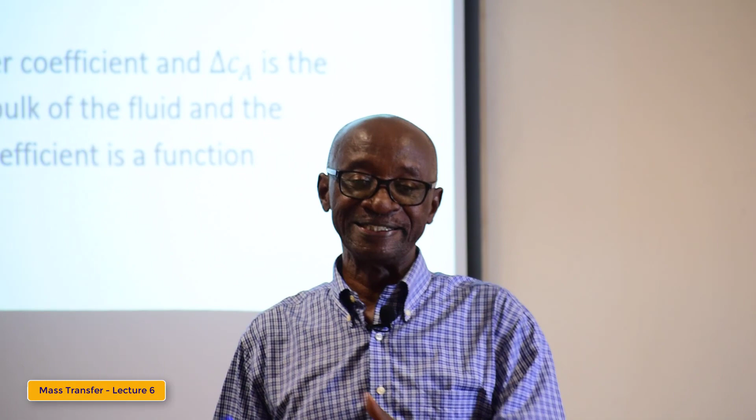In engineering, we start from the simple, and then we complicate it, as it were, to meet with reality. Sometimes the simple form that we start with might not even be realistic, but it teaches us something. Like in thermodynamics, when you want to represent the behavior of a gas, you start from the ideal gas. Then, as you develop along the virial equation and equations of state, it becomes complicated. You end up with something that represents reality.

In mass transfer, the same principle is applied. When we started out, we were looking at molecular diffusion. So I told you that you can imagine we are in a room where all the doors and windows are closed, fans are shut off, and then you release some gas in one corner. Then it finds its way into all corners of the room, just by molecular diffusion. In that kind of situation, there's no bulk movement of the gas because the windows are closed and everything.

In industry, you can't always do that. Even at home, you don't do that. When you prepare your tea or coffee, you put sugar in there. You don't sit down and let the sugar dissolve to all corners before you drink it. You don't have time for that. No more do they have time to wait in industry. So you move things around, you pump things around, you use compressors, you use blowers, and all of those kinds of things in order to hasten the process.

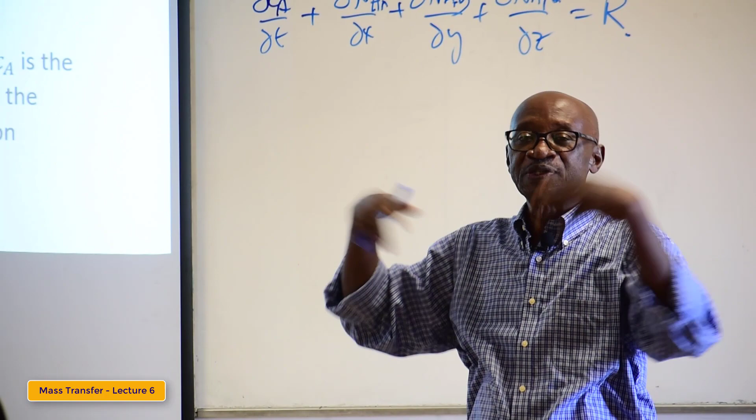And what we do is we define - that's where the concept of mass transfer coefficient, heat transfer coefficient, comes in. You define an equation, Na equals Kc delta C. So the flux is equal to the driving force, which is the delta C, and as I said, 1 over Kc is the resistance, and that is it. All you want to do then is find Kc. If you can get Kc, then the problem is done, because normally the delta Ca can be obtained from the description of the problem.

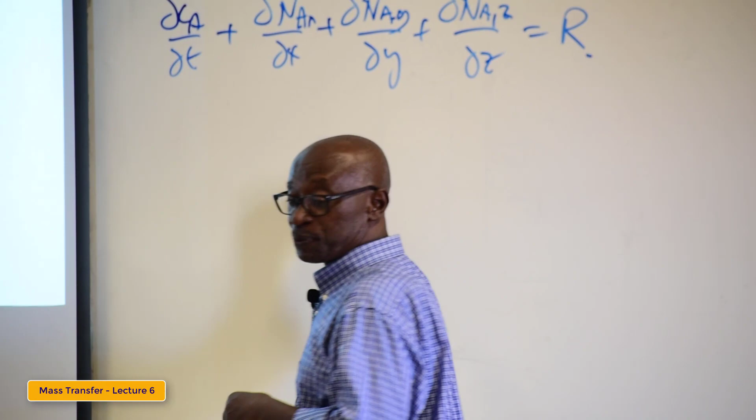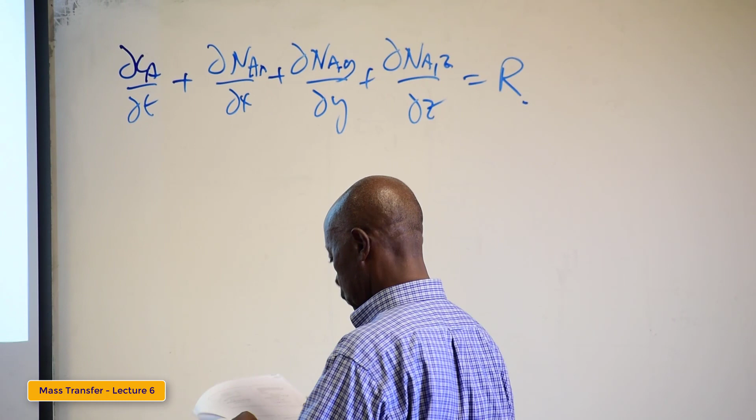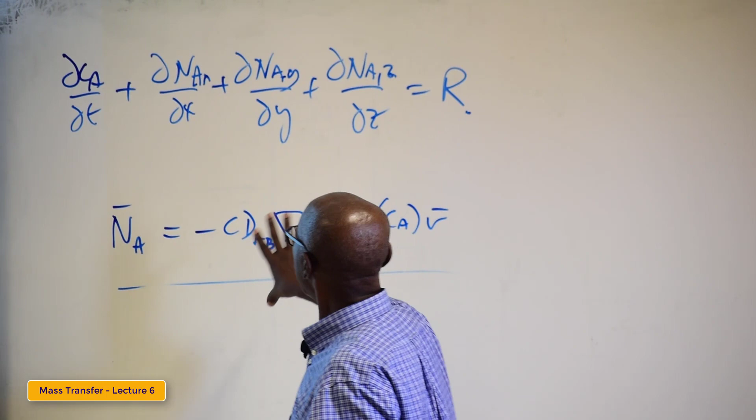So in convective mass transfer, when you express this equation... if we replace, let's say Na... Na bar equals minus C D AB grad X bar A plus CA. So if you write Na as such, then in vectorial form, Na is a vector that consists of Nax, Nay, Naz. So using the vectorial form, del CA over del T plus del dot Na bar is equal to RA.

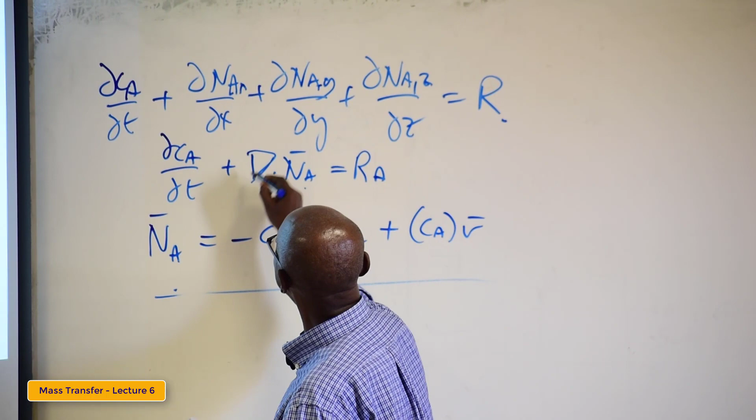So if you plug this in, then you are going to have a very complicated looking equation: del CA del T minus... C D AB grad x bar A, plus grad dot... CA is equal to RA.

Now, this equation looks easier, more easy to grasp. But this is the same equation as this, except that we have replaced the Na's with this expression - we substituted for Na. In fact, this equation probably should have come here, because when you expand this, this is what you get. You expand this, this is what you get, and then we have substituted for the Na, which is this, and then you get this.

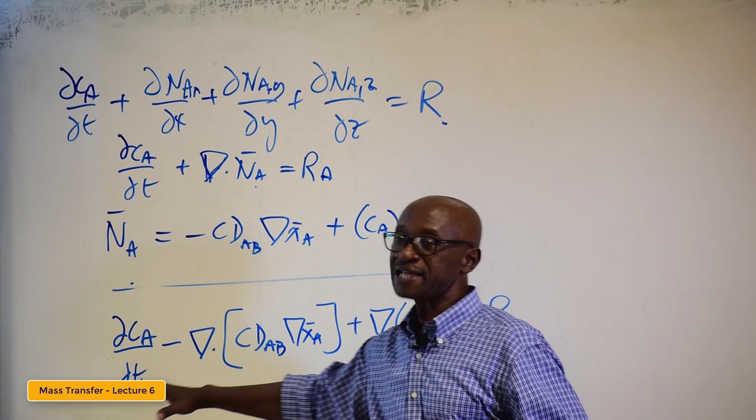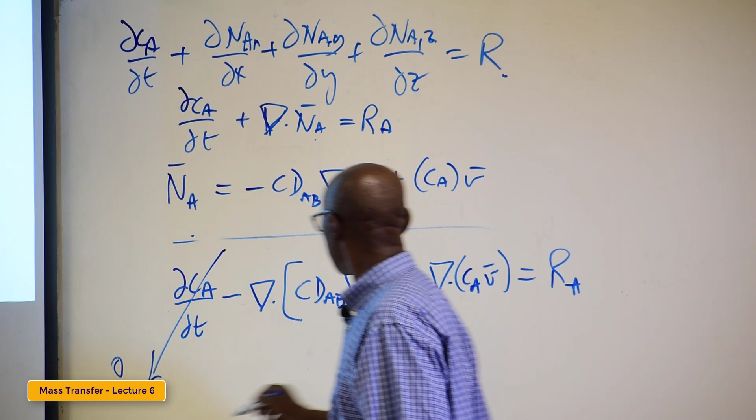If you recall, in lecture 2 we derived this equation, and then we set up all kinds of conditions to simplify it. For instance, we said suppose C is constant, or suppose the density is constant - it's the same thing. And suppose the diffusivity is constant - it means all of this gets pulled out. So if your situation is steady state, once again this term goes, and suppose the concentration or density is constant, and you have C D AB all coming out, then you have this thing, XA, plus you have this. If you go back, you find that we expanded it, applying the fact that composition is constant or density is constant. If you expand it, it's like the differentiation of two terms - you hold one, you bring the other, and so on. So if you do that, one of the terms will drop out, and you are left with this: CA, it will be V dot grad CA.

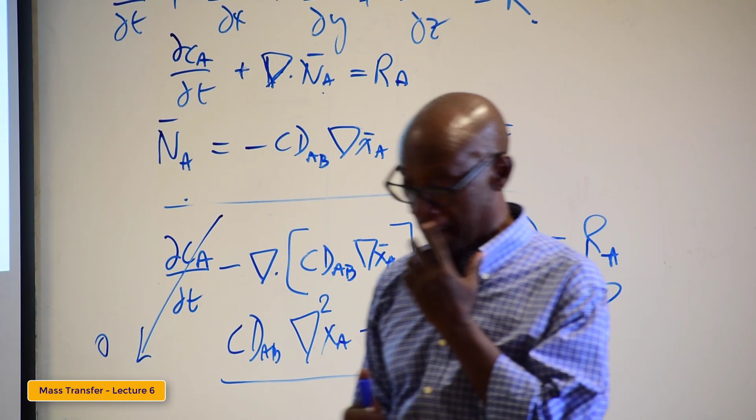If the reaction is constant, this term also drops out, and then you are left with this. But to get here, we've had to make all kinds of adjustments before we get here. So it is never possible to solve this equation with all the necessary terms and conditions. So to simplify that kind of situation, we define the equation for mass transfer coefficient, and we go about trying to find what Kc is.

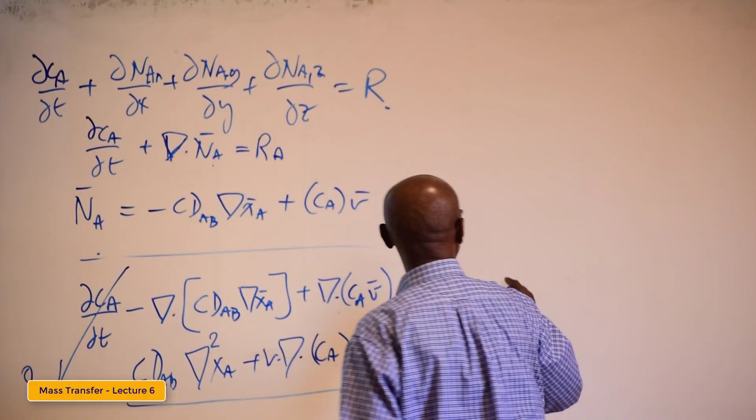What is this mass transfer coefficient for the phase that we are dealing with? Mind you, in convective transfer, you have a surface, and then you have, let's say, gas. So material is going from here to this phase, and you are trying to find the rate of, or the flux for the material going from, let's say A, into this, and so on.

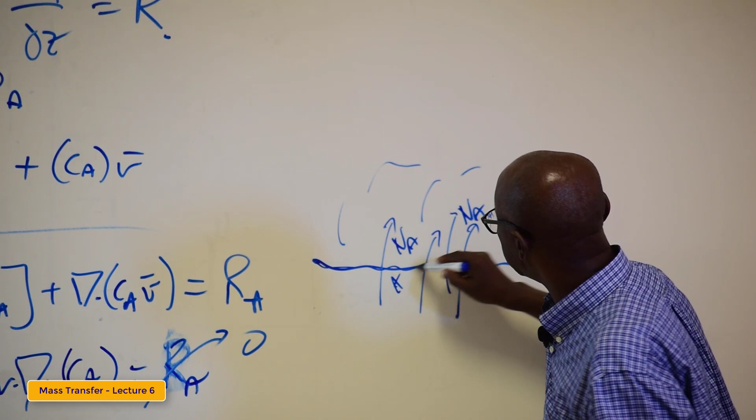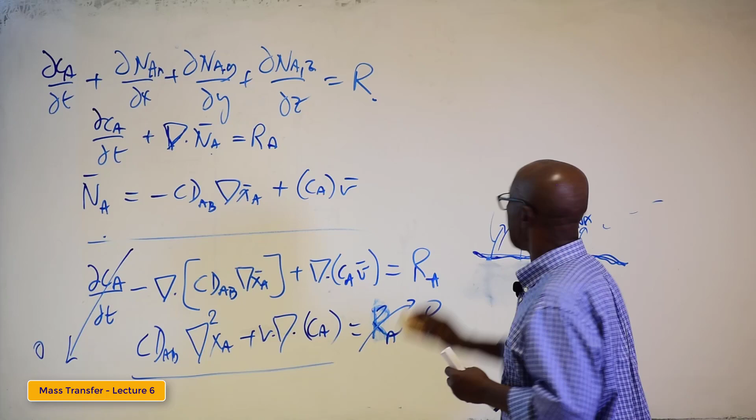You do it by determining the mass transfer at the surface. If you determine the mass transfer at the surface, then you have an expression for Na, out of which you can extract your mass transfer coefficient, Kc. If you have a way of determining the mass transfer going from the surface into the bulk, then you get an expression, and you compare that expression to the defining equation for mass transfer.

It will allow you to extract the mass transfer coefficient Kc. You understand? So we have made this definition for mass transfer coefficient Kc, and we want to find what Kc is. If by some means you get another expression for Na, then because that expression will involve delta Ca, you can get your Kc out.

Now, the Kc is a function of, it's a complicated kind of solution. It's a function of the properties of the fluid. Example, its density, its viscosity, its concentration. All those play a role in determining the mass transfer coefficient. It's also a function of the dynamic characteristics of the flowing fluid. How fast is it flowing? The velocity at which it's flowing, is the flow laminar, is the flow turbulent, and so on. So they are all part of it.

And also the geometry of the specific system of interest. Is it flow in tubes? Is it flow over a flat plate? Is it flow over a bundle of tubes or pipes or whatever? Particularly for heat transfer, that can be very important. So by listing all this, there are various methods of determining the mass transfer coefficient.

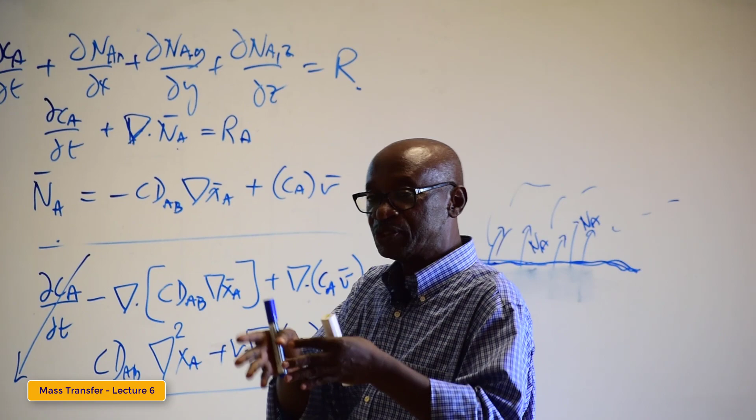When you have a complicated functional dependency like this, one of the methods you use is dimensional analysis. I don't know if you did dimensional analysis in fluid flow, fluid mechanics. That's where everybody does it, because once you do it there, you can use it in mass transfer, you can use it in heat transfer. So you don't do it at this point. When you were doing momentum transfer, fluid flow, you should have done dimensional analysis. That's fine.

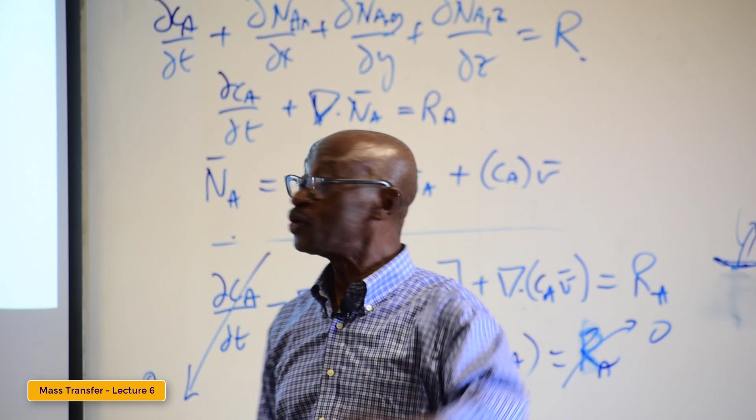But at this point, I'm just assuming that you know how to do that, you know dimensional analysis. Maybe in future, along the line, if you need to know it and you didn't do it, you have to go back and study it. Now, so that's one method of determining the Kc. You write Kc as a function of a whole bunch of properties, then you group them up, and when you do that, you also need experiments in the way it's done. You do that theoretical analysis, but you also use the experimental data to complement your analysis.

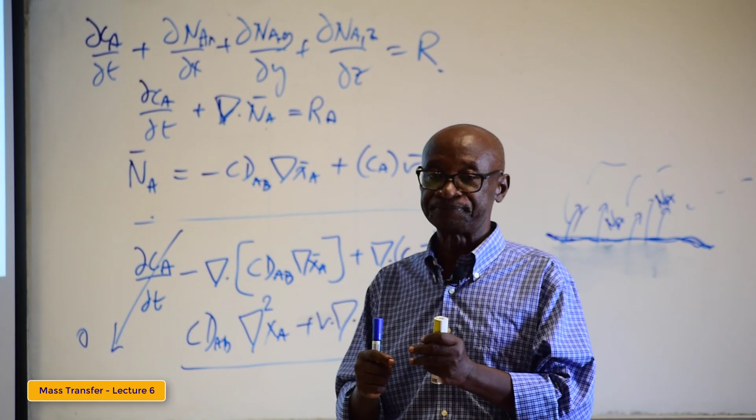So apart from dimensional analysis, you can do exact boundary layer analysis. Now, what does exact boundary layer analysis mean? It means that you have to solve the equations, depending on which ones you can get a solution to. You have to solve it so that you use it to define a flux equation, or use it to get an expression for flux, and then you go back to the defining equation and extract your heat transfer coefficient.

The thing about heat transfer and mass transfer coefficient is that once you get the mass transfer coefficient, or once you have a correlation for the mass transfer coefficient, if you want to know your flux, all you have to do is use that equation. That's it. Or use whatever correlation you're given to get the heat or mass transfer coefficient, and then use the defining equation, and then you've got your flux.

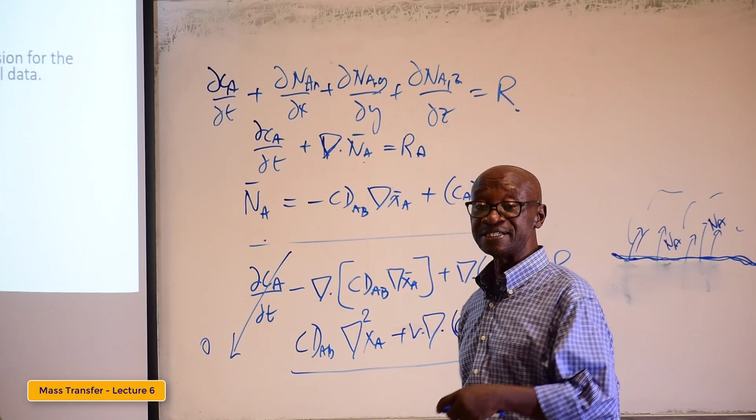So the method that we use is exact boundary layer analysis. We'll see about that, and then you can also use approximate boundary layer analysis. Approximate means that you have skipped solving these equations in their complete analytical form. Another method that's also used is the analogy between momentum, heat, and mass transfer. We'll see about that maybe next week.

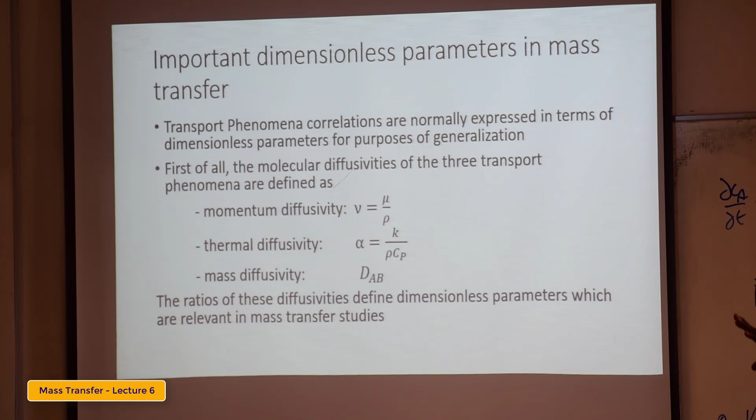So dimensional analysis, we'll leave out exact boundary layer analysis for now. But before we do that, in any of these methods, whether dimensional analysis, exact boundary, or approximate, you express mass transfer correlations, mass transfer coefficient correlations, as well as heat transfer coefficient correlations, and all kinds of correlations in momentum transfer, in terms of dimensionless parameters. So transport phenomena correlations are normally expressed in terms of dimensionless parameters for purposes of generalization. Once you do that, you don't need any specific units, because the parameters are dimensionless. Because they are dimensionless, I can use any units for them.

So first of all, the molecular diffusivities of the three transport phenomena are defined as such. This defines the momentum diffusivity, nu, or kinematic viscosity. Mu over rho is the dynamic viscosity, so nu is the kinematic viscosity. And then you define thermal diffusivity alpha, which involves the thermal conductivity, the density, and the heat capacity. They all have the same units — these three diffusivities — mass diffusivity is meters squared per second, centimeters squared per second, and so on and so forth.

Now, the ratios of these diffusivities define dimensionless parameters which are relevant in mass transfer studies. Because they all have the same units, if you divide one by the other, you end up with a dimensionless number. So we define the Schmidt number as the momentum diffusivity, nu, over the mass diffusivity, dAB. Remember that nu is equal to mu over rho. So this gives you what you call the Schmidt number.

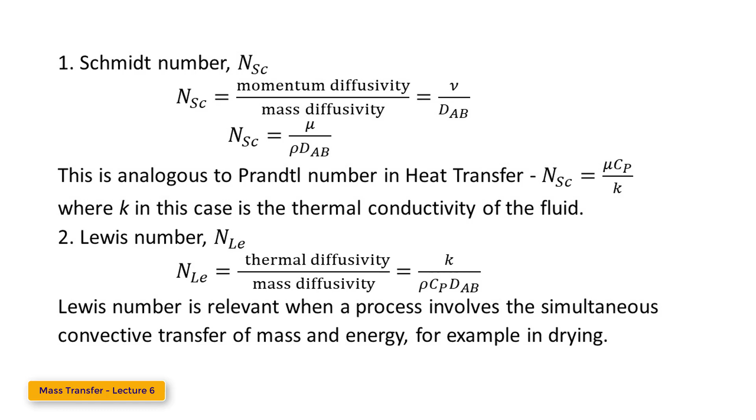And then we also define the Lewis number. The Lewis number is the ratio of thermal diffusivity over mass diffusivity. The Lewis number is relevant when the process involves the simultaneous convective transfer of mass and energy, for example in drying. It's not only drying — humidification, drying, crystallization, all those processes involve simultaneous transfer of heat and mass.

And then there's the Sherwood number. The Sherwood number is the convective mass transfer coefficient over the molecular mass diffusivity, defined as Kc times L over dAB. And the heat transfer analog of the Sherwood number is the Nusselt number, defined similarly, where H is the heat transfer coefficient and K is the thermal conductivity.

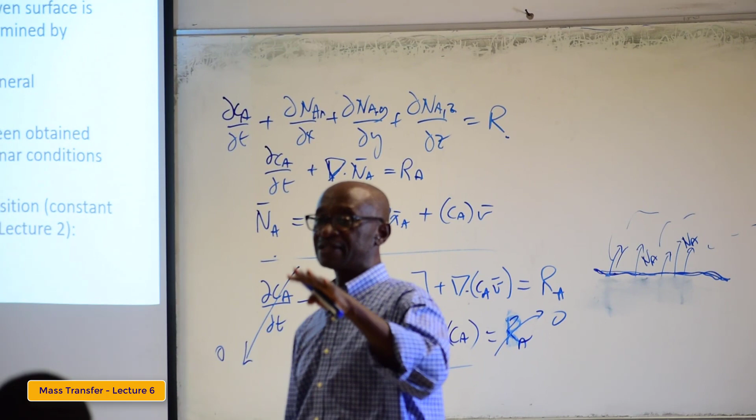These dimensionless groups are used in dimensional analysis. So now we have three situations that we look at: exact boundary layer analysis, approximate boundary layer analysis, and then — but not today, next time — we will look at the analogies between momentum, heat, and mass transfer. Then we'll do interfacial mass transfer. That'll be next time, and then we'll finish.

So if the concentration profile for a given flow, for a fluid flowing over a given surface, is known, then the mass transfer coefficient can be determined by applying the defining equation. I told you the defining equation: Na, for instance, is equal to Kc times delta C, and the concentration profile is where the concentration occurs. So we have Na equals Kc delta C. Delta C is nothing but the concentration profile.

The profile can, in theory, be obtained by solving the general differential mass balance equation. Now, an analytical solution of these equations has, however, been obtained for only the simplest of cases, namely flow under laminar conditions, not turbulent conditions, over a flat plate, not a tube. The steady state, not unsteady state. So all of those things.

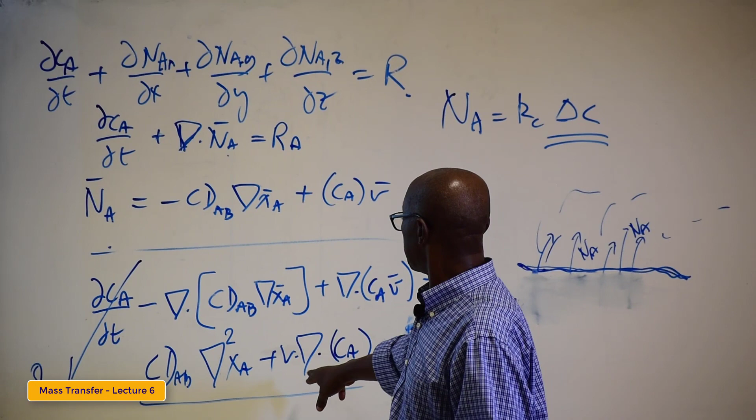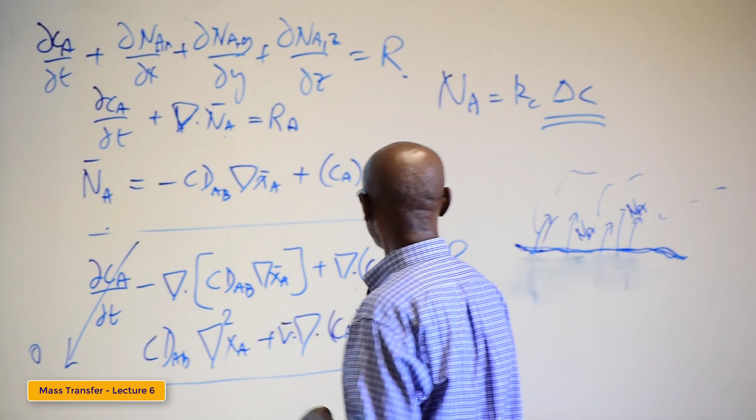Now, as I told you, this equation is nothing but this equation in fluxes, and we have replaced the fluxes with these expressions because they contain concentration, and they also contain velocities. This V is nothing but a velocity vector. So we are dealing with a situation where the fluid... first we started by shutting the windows and exhausts, now we've opened them. The fluid is moving. So the velocity of the fluid needs to be taken into account in solving, and this is where it appears.

Okay, if you expand this equation, then you end up with this, because these signs are all like shorthand for derivatives. So if you expand them, then you end up with this. Now, this is for three-dimensional flow. You have variation x, y, z. But we are looking at flow over a plate.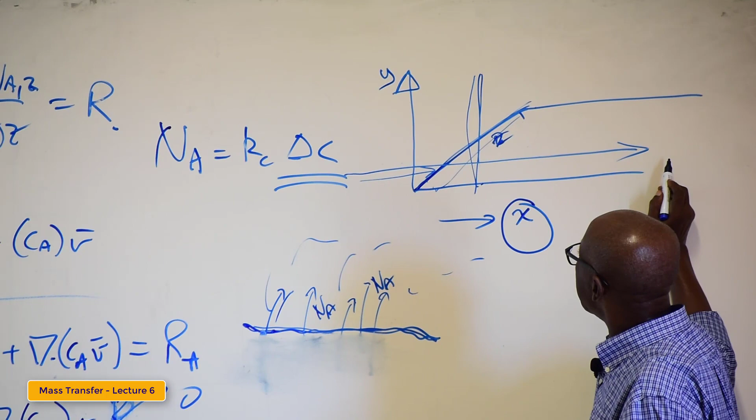So the plate is like this, and flow is going like this. We are calling this the x direction. And if z would be here, this would be z, and then the flow, this would be y direction. But we are not interested in the variation in the z direction. We are interested in two-dimensional flow, the flow in the x direction, because this is where the fluid is moving. But there's going to be variation of velocity and concentration in the y direction. You understand?

The concept of the boundary layer was first introduced by Prandtl. He was German. I don't know whether he was an engineer, but he was German. The idea of the boundary layer was that he said the resistance to flow, if you have fluid flowing in a tube or across a surface, is confined to a small thin layer on the surface of the flow. And as you move away from the surface of the material, the resistance diminishes. The region within which this resistance is felt is what he described as the boundary layer.

So, for instance, if you have a plate and you have fluid moving across this plate, what it means is that the liquid that touches the very surface of the plate is going to be trapped on the surface. It's like rolling a carpet. The first layer of fluid that touches the surface is going to be caught on the surface. And so we have what you call the no-slip condition, that the fluid does not drag itself across the surface, but the first layer just stays there, and then the next batch rolls along over that initial surface.

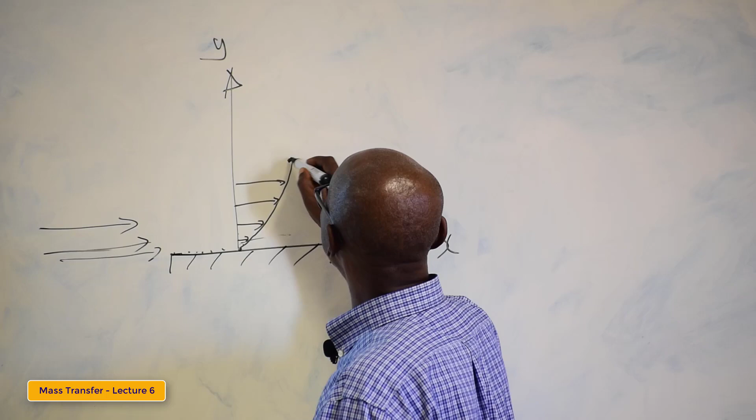So what that means is that if you are looking at the variation of velocity, this is your y direction, and this is your x direction. If you are looking at the variation of velocity in the y direction, here on the very surface of the material, what would the velocity be? The velocity will be 0. But as you move away from the surface, then you have some velocity. So normally, you find it in books, they would draw something like this. The velocity is 0, but then as you move...

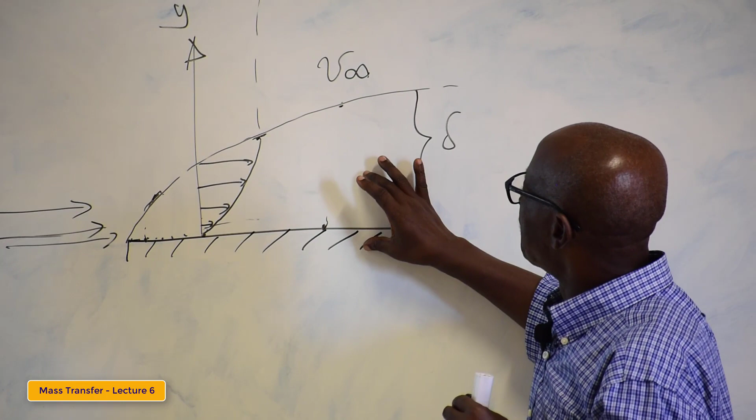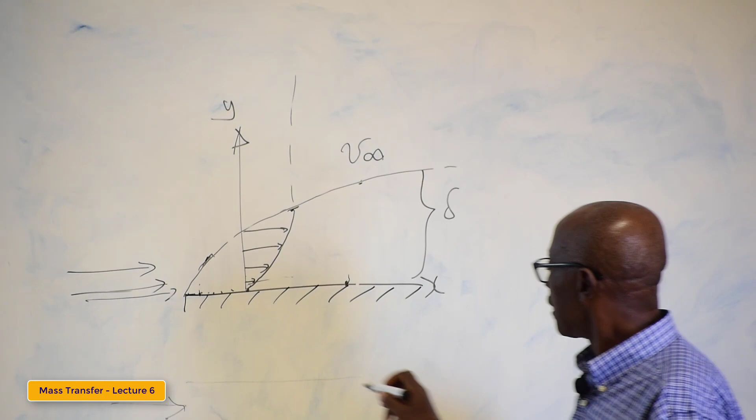You reach some surface, then the velocity will become the same as the bulk velocity. Now, the maximum velocity will probably occur at this point, and so you end up drawing a line like this. Beyond this, within this area, you have the full velocity, which we designate as v∞, on the outside of this space. This defines what we call the boundary layer. It is a very small thin surface, at least that's how we picture it, but in a drawing like this, you have exaggerated it. Certainly you can imagine that something like that will happen, because if you have a pipe and you have a flow within the pipe, the liquid does not come out like toothpaste. It comes out looking like this.

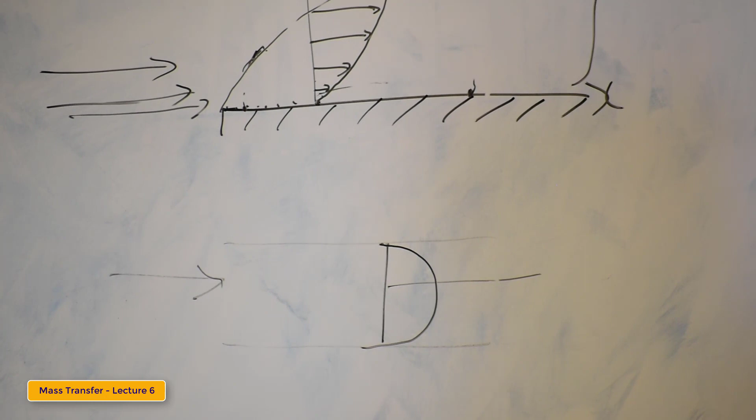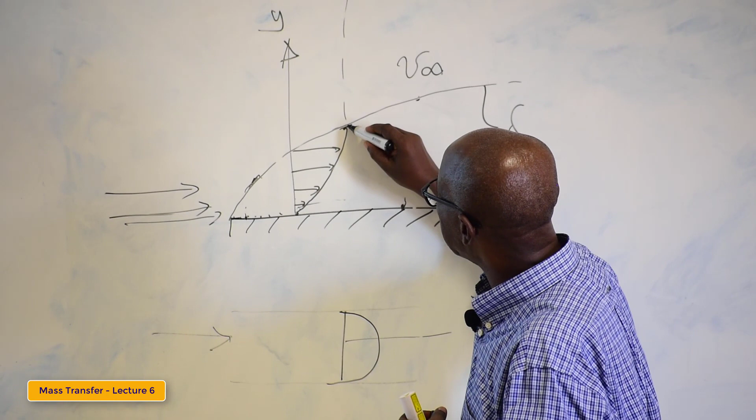Okay, so the velocity profile in the case of a tube is a parabola, and you can derive it. Experiments have shown that's how it happens. And so there is variation of velocity because of the nature of this. There is variation of velocity v at a given point x.

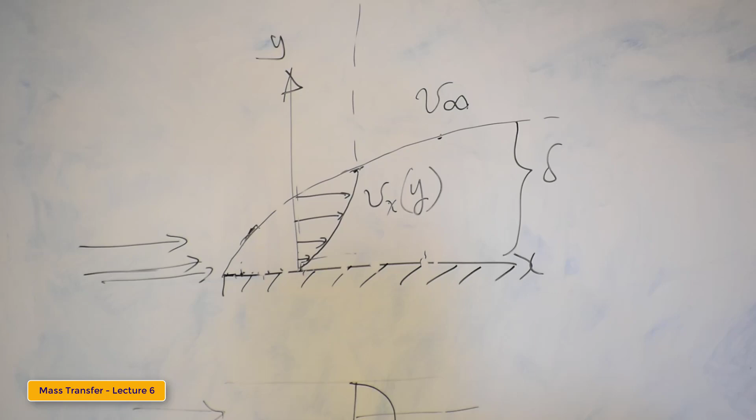So that is x. If you write Vx, it means the velocity at a given point like this. So that itself is going to vary. Now, this velocity at a given point is going to be a function of y, right? So if you are standing at this point x, the velocity at x is going to vary with y. So the velocity at x is a function of y, right?

Now, the velocity at x would also be a function of x, right? That's not hard because you are going. So the velocity at each x will be a function of where you are.

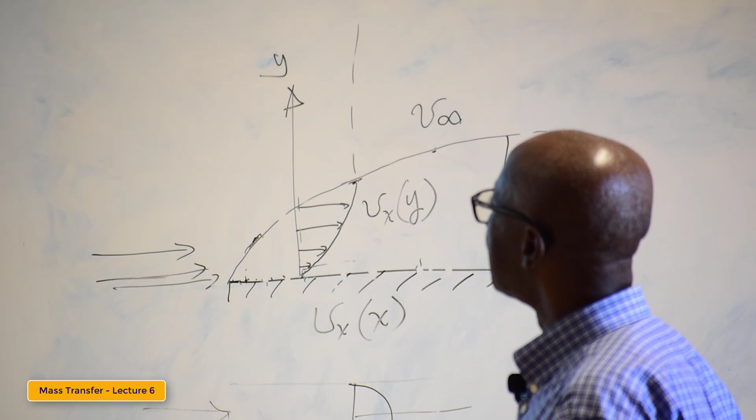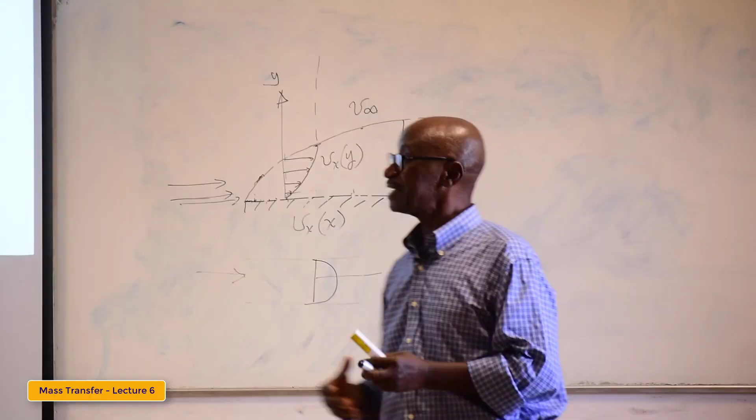Okay, so this equation is what we are looking at. We are interested in determining the concentration profile of material which is flowing on a flat plate. So the plate has a certain width, and then it has a certain length. But we are interested in the variation of concentration in the direction of movement of the fluid, and also in the direction perpendicular to it.

Okay, previously there was no flow. We were looking at molecular diffusion, but now there is flow, and therefore these equations, Vx, Vy, and so on, are not constant, or they are not zero.

Now, we are looking at two-dimensional flow. So if you are looking at two-dimensional flow, then we can drop one of these terms. We are looking at variation in the x direction and the y direction. We can drop the flow going inside. The flow going inside will be the z direction, but we assume that there's no variation there, so it doesn't interest us. So we can drop this one, and then we are left with these two. And then on this side, same thing, three-dimensional, but we are looking at two-dimensional, so we drop one term.

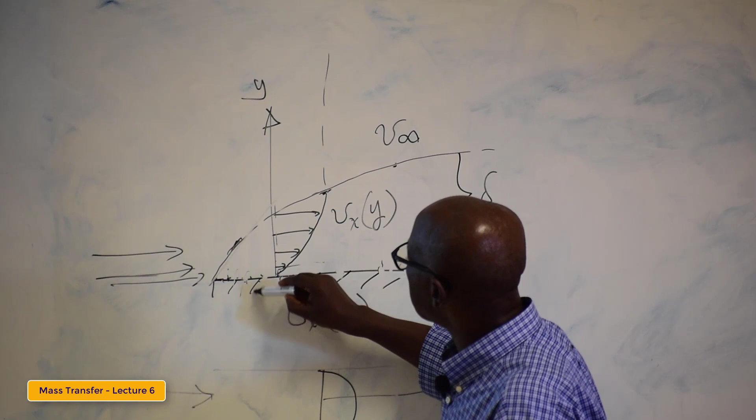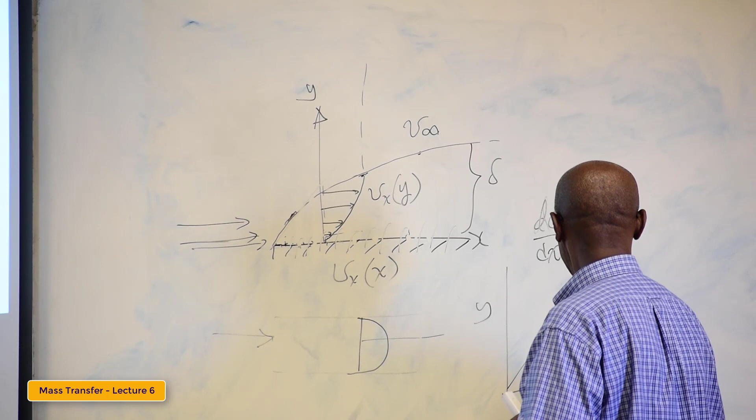Adding to the fluid, and so definitely by the time the fluid reaches here, the concentration has increased. And so dCA/dx will not be equal to 0. It is like drawing a curve. You draw this, it has a slope. So the dy/dx is not equal to 0.

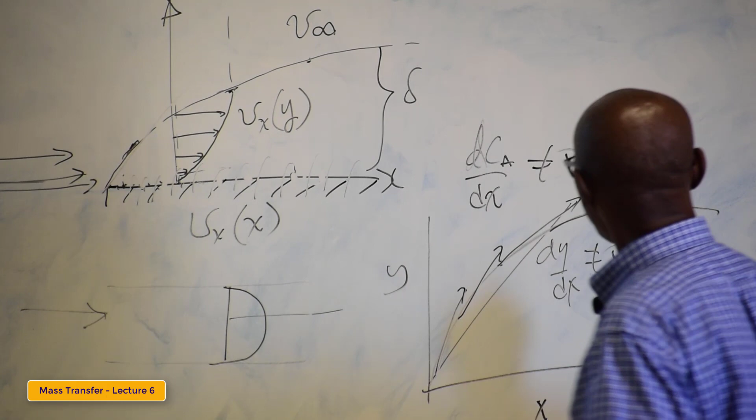But if you had a curve that looks like this, then you can see that the dy/dx is going to be varying. So the slope itself is going to be varying, right? So for this curve, you can say the second derivative, d2y/dx2, is not equal to 0 for the second curve. But for this one, d2y/dx2 will be equal to 0. But the original slope is not equal to 0.

It's the variation of the slope that this term represents. So in other words, we are assuming that we have a curve that varies in slope, but the slope is so small, if you like. So the rate of variation in the x direction, we assume that is small.

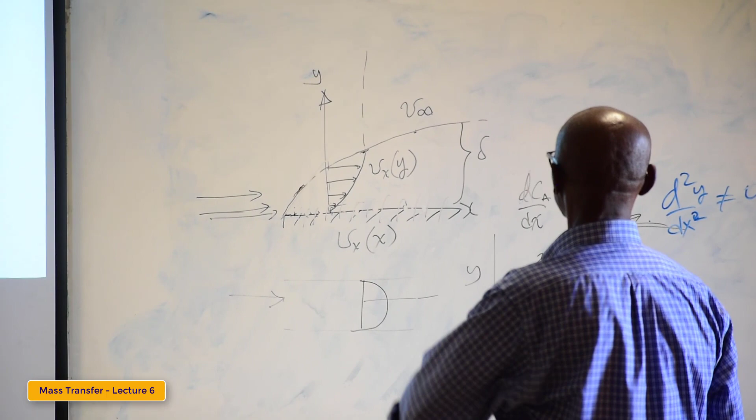Okay, and that way we are able to drop this term. So when we drop it, we need an expression for Vx, Vy, because these terms, as I explained to you, they vary along the x-axis. They are not constant. So what is the relationship between Vx and Vy and distance?

That relationship is obtained from the differential mass balance equation. It's called a continuity equation. It has been simplified, and for a two-dimensional constant composition fluid, this is what you end up with.

If it's two-dimensional, the composition or density is constant. So in trying to solve equation 3, you have to add equation 4 to it, and solve the two simultaneously, because equation 4 accounts for the variation of Vx and Vy, which are not constant—they are different functions. So it's a simultaneous partial differential equation that you need to solve. The solution of 3 and 4 will give you the concentration profile.

Equation 3 can be compared. So now we have established these are the equations we need to solve. But what we do, and that is why you always start with the study of fluid mechanics, is note that in fluid flow somebody solved this long ago—Blasius. This equation comes from the Navier-Stokes equation, from the force balance. Then you do your mass balance and get the continuity equation, and in fluid flow you get this. So somebody has solved these two together.

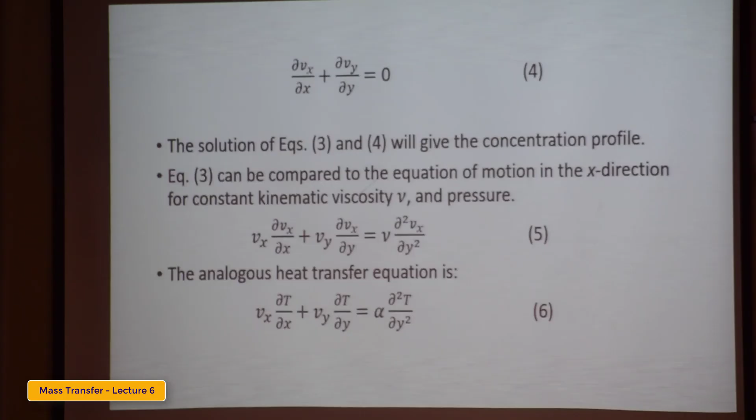What we want to do is solve this and this. If you look at the two equations, instead of Vx we have C, but instead of nu we have DAB. So the analogous equation in heat transfer is this.

These have been solved using the original solution by a fellow known as Blasius. So the mass and heat transfer equations, equation 3 and 6 respectively, are solved by comparison to the solution of the fluid flow equivalent, equation 5, and in each case employing equation 4. Equation 5 is what has been solved, but to get Vx and Vy, because they vary, you use this equation together with it. The same way, you solve equation 3 with this, or equation 6 for heat transfer with this.

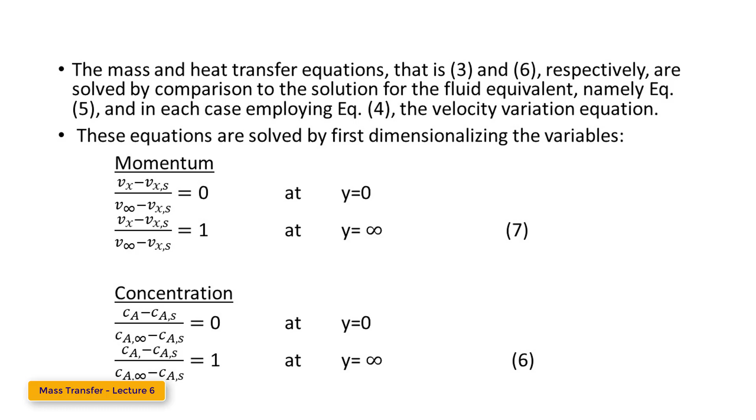Now if you compare the two equations—the one for fluid flow, equation 5, and the one for mass transfer, equation 3—the two solutions will be identical provided the diffusivity DAB is equal to nu. So comparing equation 5 and 6, the two are identical when nu over alpha, which is the Prandtl number, is equal to 1. That is flow and heat transfer. Now flow and mass transfer gives you nu over D, the Schmidt number, equal to 1. So the two quantities are identical.

This is equal to this for heat transfer—if this nu equals this, then that is the situation where the Prandtl number equals 1. And for mass transfer, if this equals this, then the two solutions should be identical, and in that situation the Schmidt number equals 1. So for heat transfer, Prandtl number equals 1, Schmidt number equals 1.

Then we can just use the Blasius solution for momentum transfer or fluid flow, and that is given like this. If you want the details of how you arrive at this, you have to go back to the original paper, but this solution is found in all kinds of textbooks—nobody bothers to go back. So here we are: for momentum transfer or fluid flow, he got this, and it's equal to 1.328.

We write a parallel equation for mass transfer equal to 1.328.

Now it says, since the Blasius solution for the momentum case did not involve a velocity in the y direction at the surface, the concentration profile also involves the important assumption that the rate at which mass enters or leaves the boundary layer at the surface is so small as not to alter the velocity profile provided by the solution. Well, this is a mouthful, but this is what it means.

If the fluid is flowing alone, just the fluid, there's no mass transfer, it's going to develop a boundary layer. In fluid flow, the boundary layer is called delta, without any subscript. Now, if the fluid is flowing and there is either heat transfer or mass transfer, that is also going to have its own boundary layer.

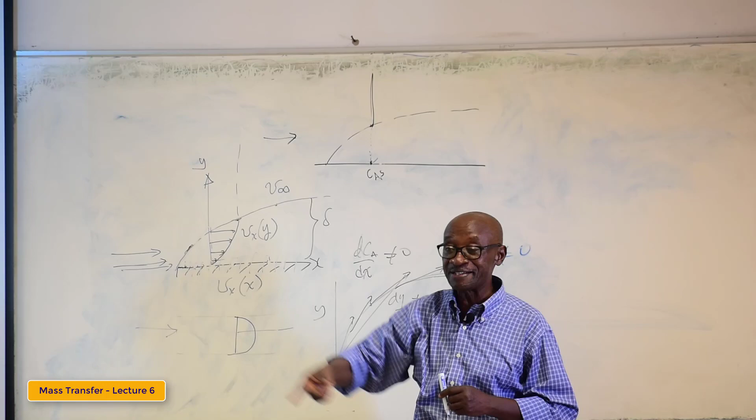But for concentration, it's the reverse. It is high at the surface, but as you go away from it, it reduces. Now, that variation in concentration would also be confined to some boundary layer. For the rest, the bulk of it is going to mix up, then the concentration is the same, but within a certain space, which constitutes the boundary layer for concentration.

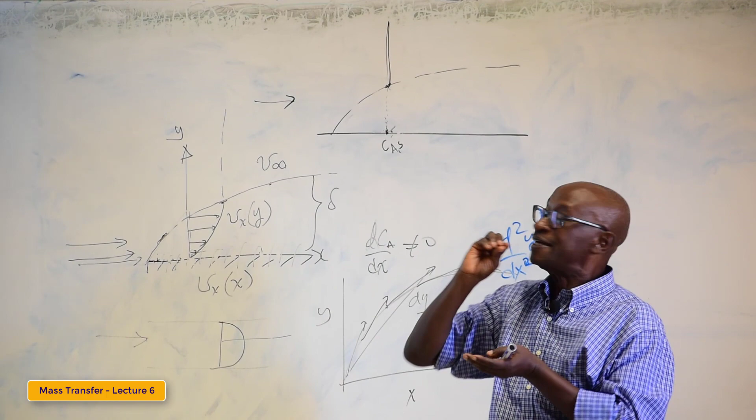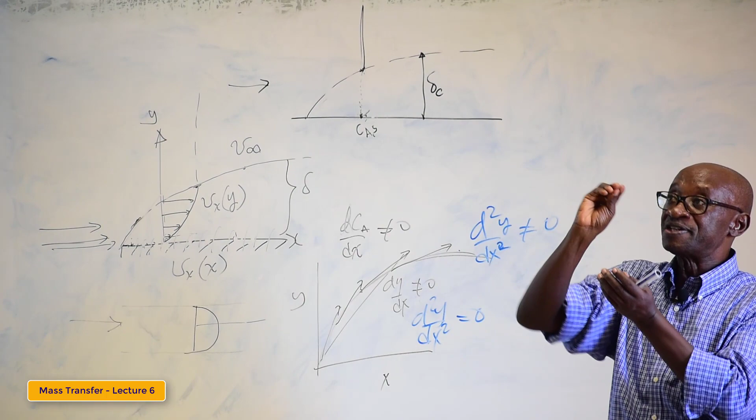So what it means is that this boundary layer for velocity doesn't necessarily correspond to the boundary layer for concentration or the boundary layer for heat transfer. The boundary layer for concentration, normally we call it delta, and then we subscript it C. In other words, for a little distance from the surface of the plate up to some point, there's going to be variation in concentration, but in the bulk, it is the same, and that edge is that length divided by this.

Now, what this thing is saying is that here there was no mass transfer, there was no variation of concentration going in the X direction, because nothing was diffusing into it. But what he's saying is that here, although there's material diffusing from the surface into this, still we say that the boundary layer does not vary. Because if the material has changed, then the boundary layer could vary. But we're saying that the rate of diffusion is so small that it doesn't affect the boundary layer that is developed as a result of the free flow.

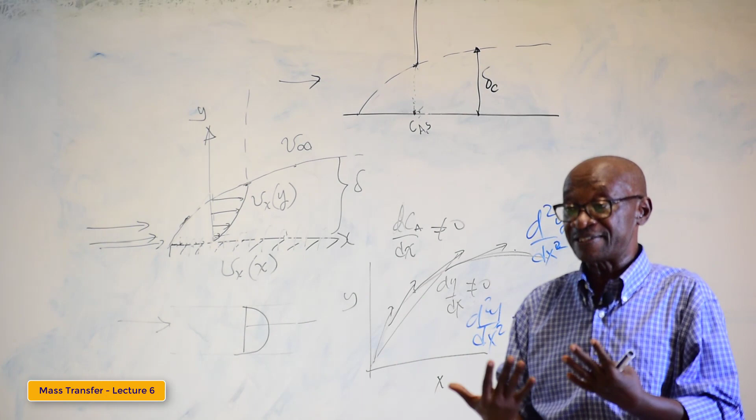So the rate at which mass enters the boundary layer at the surface is so small. You can just imagine that if the rate is significant enough to affect the viscosity, if the viscosity is affected, then the flow characteristic is going to change. But we say that the material going in is so small that the boundary layer, the thickness of the boundary layer for the velocity profile is not affected.

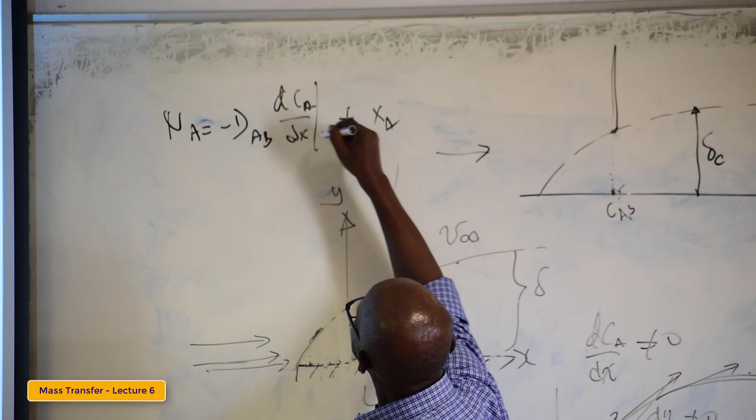Okay, now the mass transfer from the flat surface into the laminar boundary layer is given by this expression. This is important because generally you would write that the mass transfer NA is equal to minus DAB, dCA/dx, plus xA times NA plus NB, and so on.

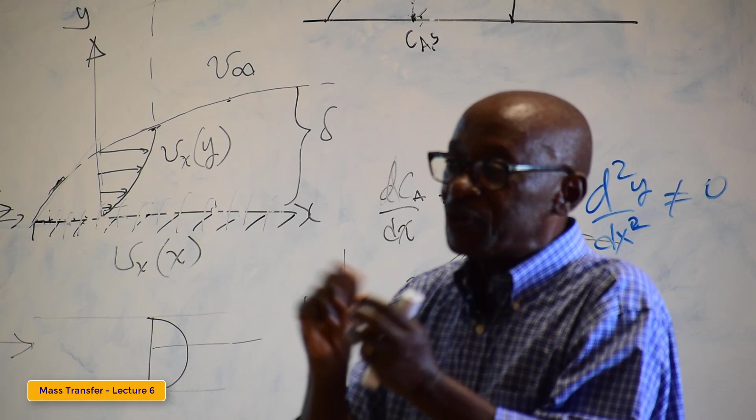But at the surface of the plate, we are looking at mass transfer for the plate, a solid. At the surface, this term is 0, because you are looking at transfer of material from the solid surface to the fluid just adjacent to it. There's no fluid flow component to that, it's only diffusion from the solid. There's no flow pushing it in the solid to bring it to the surface. So this term is equal to 0.

So you are left with just this one, and that would define it. Therefore, if you differentiate, if you plug in this expression into equation 11, then this is what you get. And this negative has been removed just to turn these two around.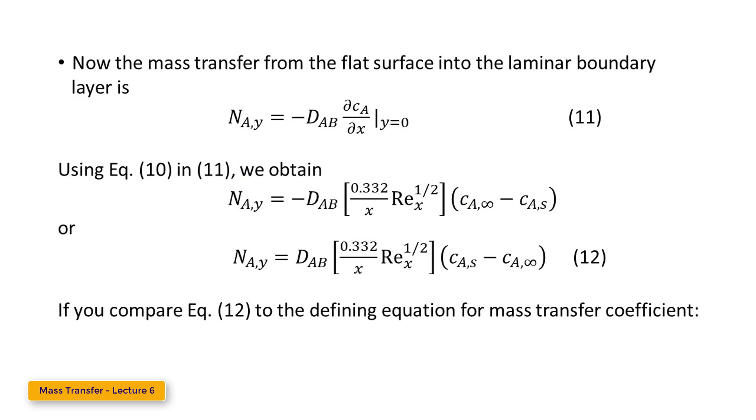So if you compare equation 12 to the defining equation for mass transfer, which is the original equation that we started with, Kc delta c, if you compare the two, then you can extract your mass transfer coefficient. So this is an expression for mass transfer.

You see that in terms of dimensionless numbers, you just put it into dimensionless form, and this is it. So what does it mean? It means that if you needed to determine the flux from a plate to an adjacent fluid blowing over it, and the Schmidt number is 1, all you need to do is know the X, the DAB, the Reynolds number at the point X, and then all you need to know is Kc. Once you get the mass transfer coefficient Kc, you can do that.

Although we do some more work on this, this is applicable to Schmidt number of unity. This equation is applicable to low mass transfer rates between a flat plate and a boundary layer. That one was mentioned if you recall. It's only when the mass transfer rate is low that the comparison or equivalence between the boundary layer for fluid flow and the boundary layer for concentration profile can be equated.

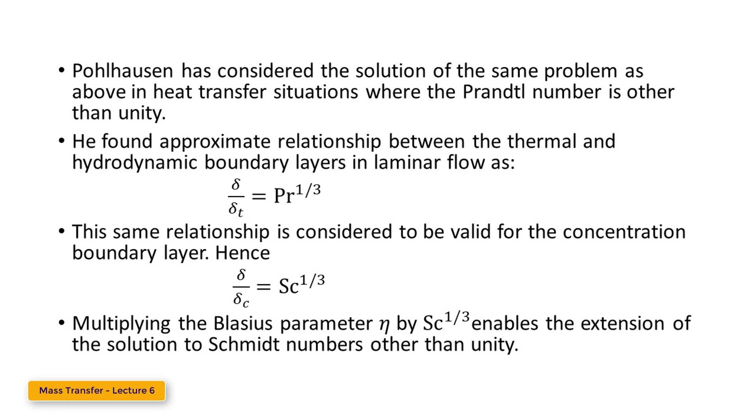At y equal to 0, the concentration gradient is equal to 0.332, and here he has multiplied the Reynolds number by the Schmidt number. When the Schmidt number was equal to 1, this term was not there.

This can be combined with equation 11, the defining equation for mass transfer, to give the mean mass transfer coefficient for a plate of width W and length L, because what we've done is found the mass transfer coefficient for a particular x.

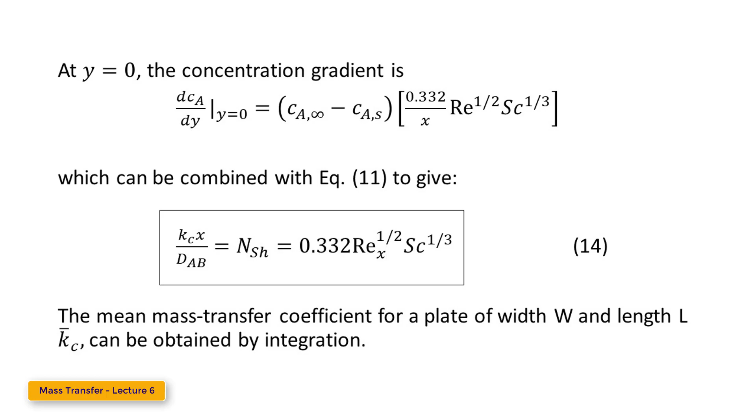The expressions we have are for various values of x. So the mean mass transfer coefficient of a plate of width W and length L is obtained by integration over the entire length of the plate. In this derivation, we set the width equal to 1.

It's unity, so the total mass transfer for this plate of area A. Now, the rate of mass transfer is given by the flux times the area, so we multiply by A, where A is the area, which will be W times L.

But we know the mass transfer coefficient was obtained for unit area, unit width. So we have to, in general, multiply the flux by the area A. This expression is for a specific x, so when you do the integration, at any value of x you are finding flux times A, and as x varies, you integrate over.

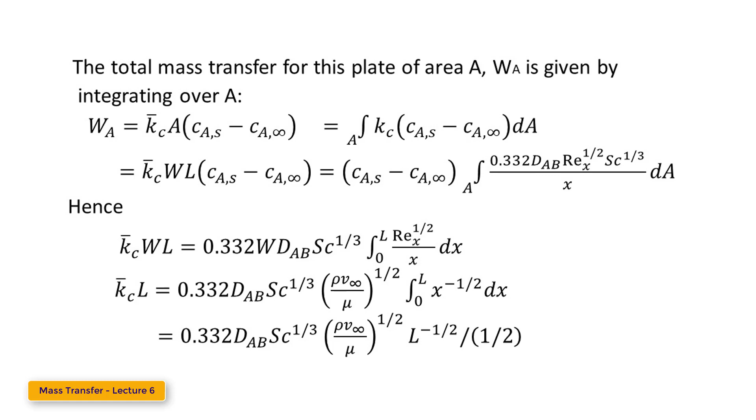If you do that integration, you come up with a mean mass transfer coefficient expression, which we have converted into dimensionless form, the Sherwood number for L. Thus the local Sherwood number at point x is related to the mean Sherwood number. If you look at the previous one, it was 0.332 and 0.66, so the mean Sherwood number is equal to twice the local Sherwood number.

We'll conclude with this example. A 1 meter square thin plate of solid naphthalene is oriented parallel to a stream of air flowing at 30 meters per second. The air is at 310 Kelvin, and the pressure of the air is given. The plate is at 300 K.

Determine the rate of sublimation from the plate. The diffusivity of naphthalene in air at 273 K and 1.013 times 10 to the 5 Pascal is given, and the vapor pressure of naphthalene at 300 K is given as 26 Pascals.

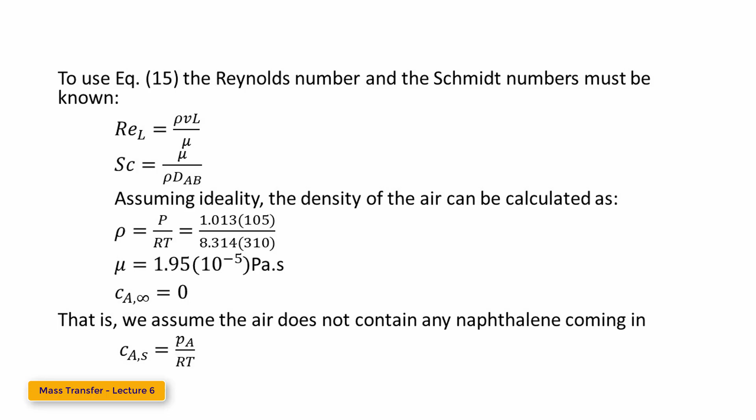CAS is what we calculate, where PA is the partial pressure, the vapor pressure on the surface. I didn't get the numerical value, but everything you need is given. With these values you can get the Kc. The rho is here, the viscosity I've given you a value for, so you can calculate everything.

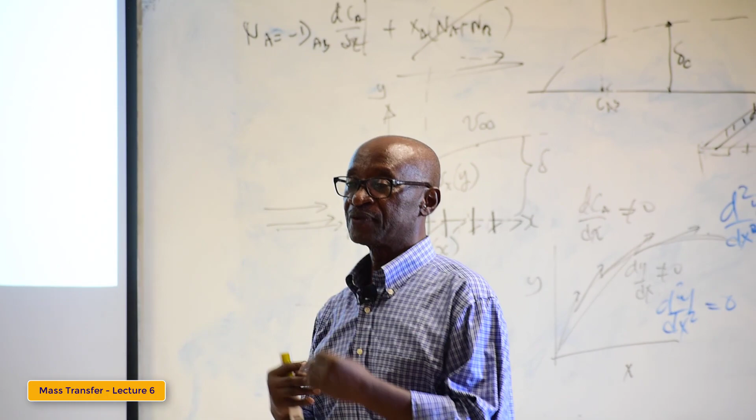So I told you there are various ways of getting the mass transfer coefficient. One is dimensional analysis. Two, the exact boundary layer solution, which we just saw, using the Blasius method applied to fluid flow, mass transfer, and also heat transfer. Then the third is approximate boundary layer analysis. The last is the analogies between momentum, heat, and mass transfer, which we'll consider next time.

Now, the approximate boundary layer analysis involves making a material balance over a control volume in the boundary layer. This approach is useful in situations where exact solutions are unknown, since solving the complete differential equation, even for the case we saw, requires making all kinds of assumptions.

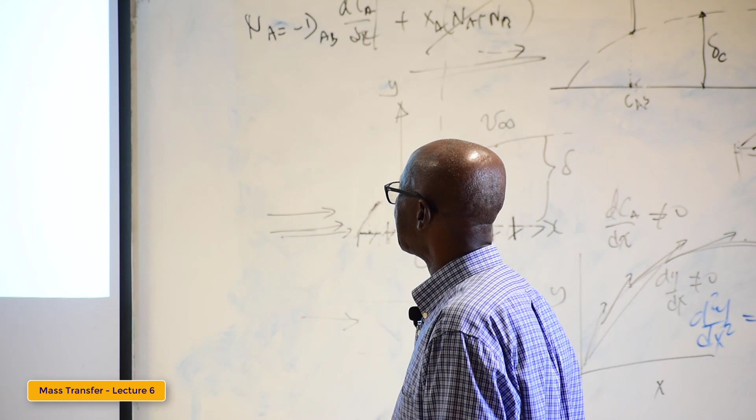So in this case, you cut out a prism-like piece of material of thickness delta x, going in, and we say it has unit depth. We do a mass balance, or material balance, over this control volume.

So the volume is designated by the block of length delta x and height delta c - strictly speaking, that c should be a subscript, representing the thickness of the boundary layer. And then that material we are looking at has unit depth.

So if you are going to do a material balance on this, you have three ins and one out. So a steady state molar balance over the control volume gives W1 plus W3 plus W4 equals W2, where WA is the molar rate of mass transfer of component A.

The individual balances are given by the flux, which is CA times Vx. So you look at it this way, but it actually has more to it than what's mentioned here.

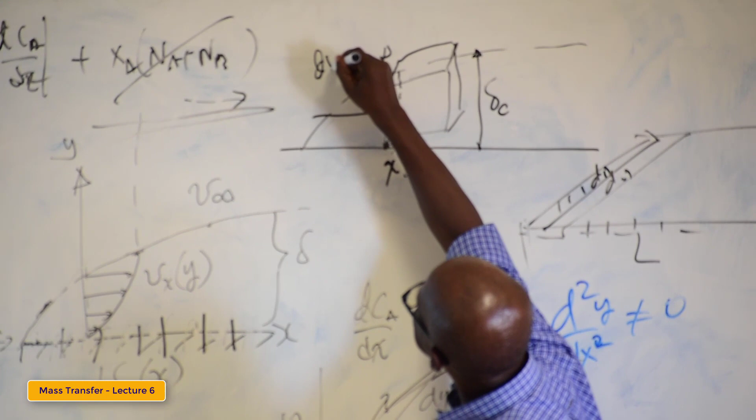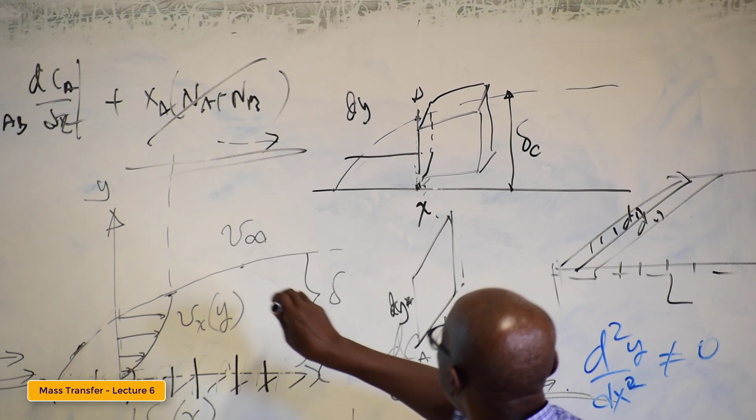If you stand at this point and look, you are looking at an area - y in this direction, delta y. And you're looking at a plate that looks like this, so you multiply this by this. This is your dy, but there is a width like this. The fluid is coming like that. Is it clear to you? It's clear, okay.

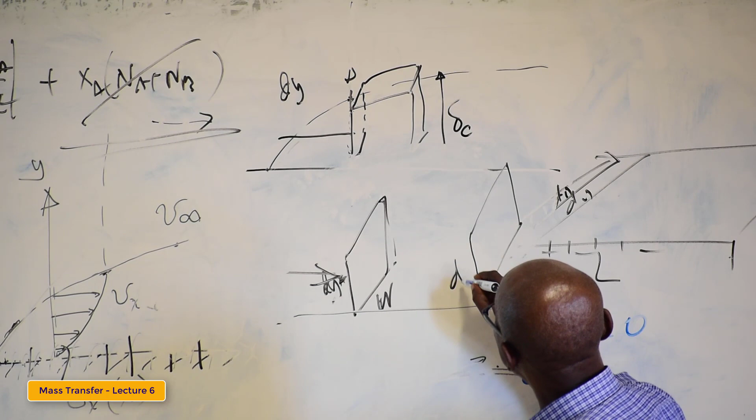If you look at the other side here, it's also like that, except this time it may be bigger. So the area, since you're doing it again, is dy times w, but w is always unity. So if you multiply Ca delta Vx times dy times 1, and because y is varying, you integrate it. This is what you get for WA1.

So standing here, when you go here, it's the same thing, except you are standing at x plus delta x. That's the WA2 going out.

Now WA3 - here you are not standing still, you are moving along delta x. So what you do is consider this same quantity, flux, and how it varies along x, then multiply that quantity by the length, delta x. But the concentration here, which we assume is the same up here - we just drew it here - is the concentration at the boundary, at the edge of the boundary layer.

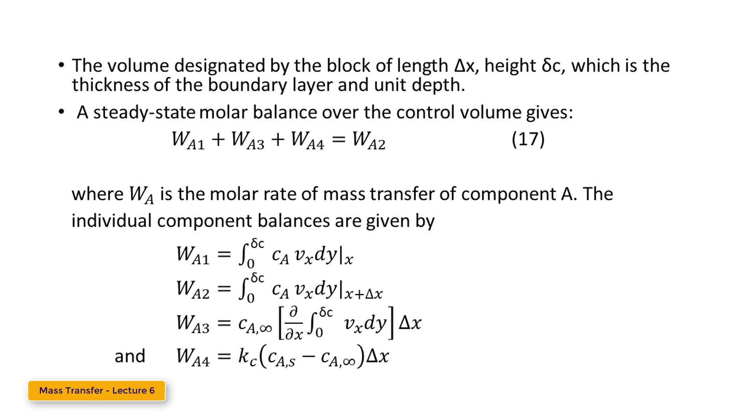If you need some further listing on it, you can ask, but later on take your time and look at it. So here, in equation 18, all we've done is substitute all those terms into equation 17, and then we end up with this.

Now these terms contain the velocity profile and the concentration profile, so velocity and concentration profiles must be known to solve the above equation. These are normally not known and have to be assumed.

In the previous situation, we took the continuity equation, if you remember, in place of the velocity profile. In this case, we don't know, so a power series is assumed for the velocity and concentration. These are the expressions we want to use for the concentration variation and then the velocity variation.

Now you notice that for the concentration it's Ca minus Cas, but here it's not Vx minus Vax, because that will be 0. These boundary conditions must be satisfied: Vx is equal to 0, velocities are 0 on the surface at y equals 0. For concentration, it's Ca minus Cas, because Cas is not 0.